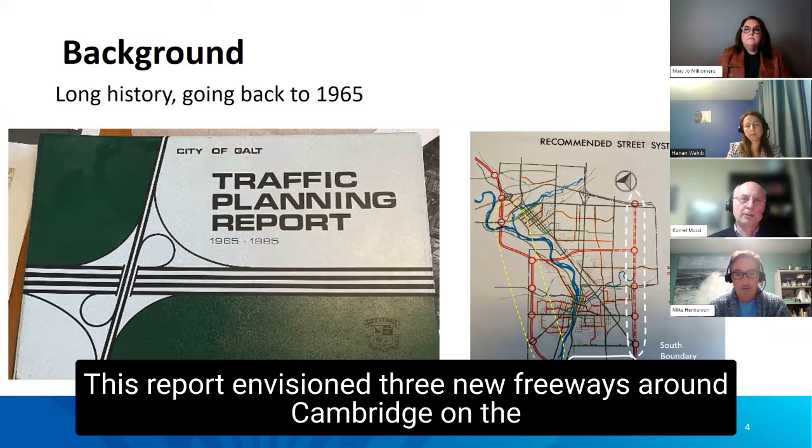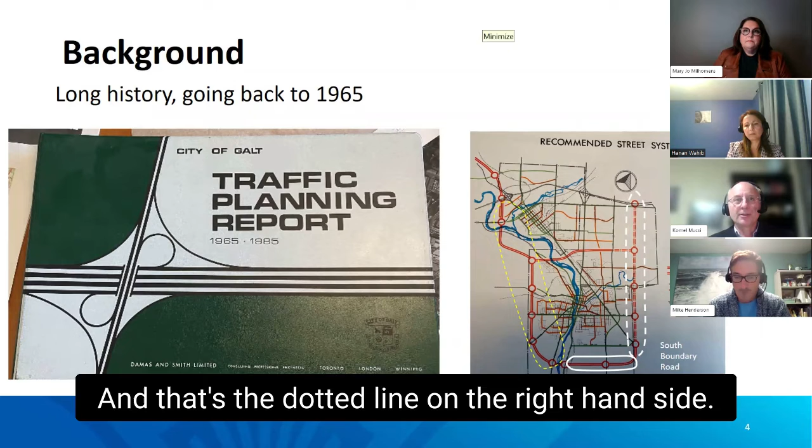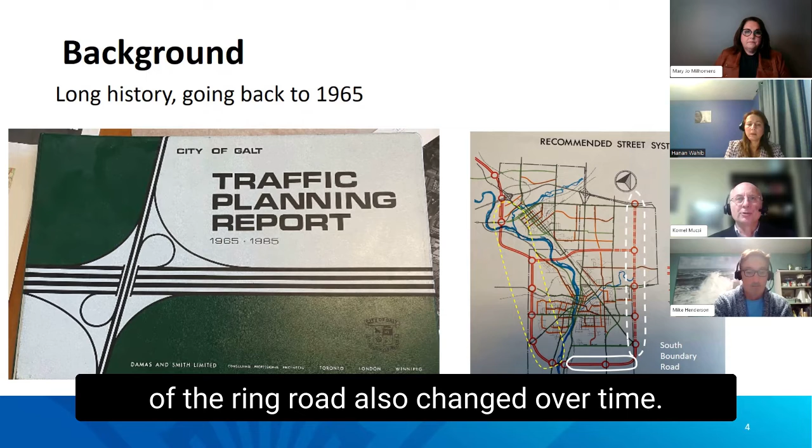The first report that talks about the implementation of a ring road was the traffic planning report done in 1965. This report envisioned 3 new freeways around Cambridge. On the west side, which is the dotted yellow line, on the south side, and it was meant to be built by 1985, that's the white solid line at the bottom, and one on the east side to be built post 1985, and that's the dotted line on the right-hand side. As I will explain in a minute, not only did the dates of implementation change by a few years, actually decades, the scope of the ring road also changed over time. Next slide.

A number of studies followed the 1965 traffic planning report. They had refinements, but continued to include the ring road concept until 2004. The 2004 detailed transportation network review introduced a no bridge option. As we understand today, this was the result of public opposition to the new road on the west side and opposition to the bridge. And those two pieces would form the west side of the ring road, and they were taken out from the ring road concept. The new truncated ring road or bypass kept the new roadway on the south side and on the east side. Next slide.

Late 2020, the region got an explicit request from the City of Cambridge Council to consider removing trucks from the downtown core as the new McQueen-Shaver Boulevard was nearing completion. And the new road opened in the fall of 2021. Next.

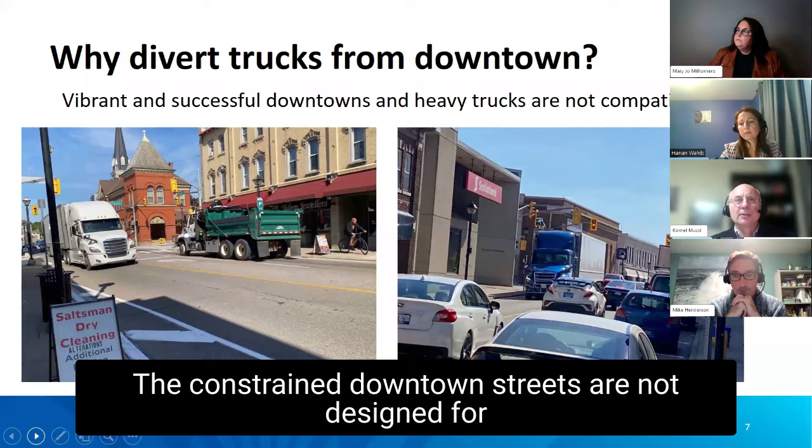So one of the big questions is why divert trucks from the downtown? We can say that a vibrant and successful downtown and heavy trucks are actually not compatible. The constrained downtown streets are not designed for concentrated movement of heavy trucks or car traffic. There are frequent signals, curbside activities, sidewalks are at the edge of the roadway, and there's very little or no buffer space. There is noise and air pollution in a very narrow corridor with little potential for dispersion. And of course, there are safety concerns, especially for pedestrians and cyclists.

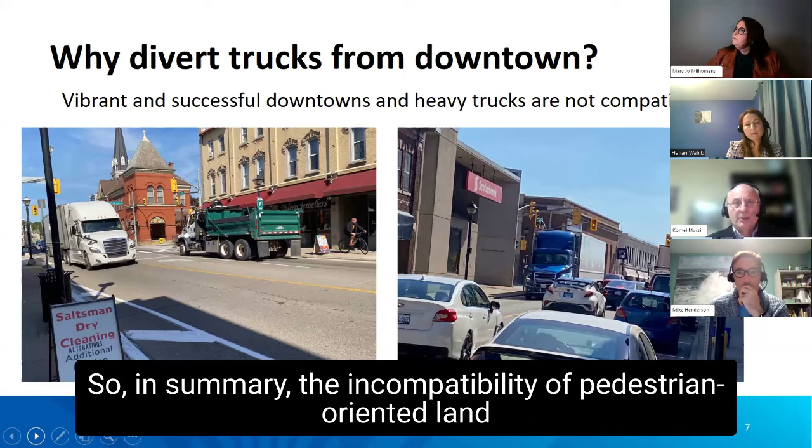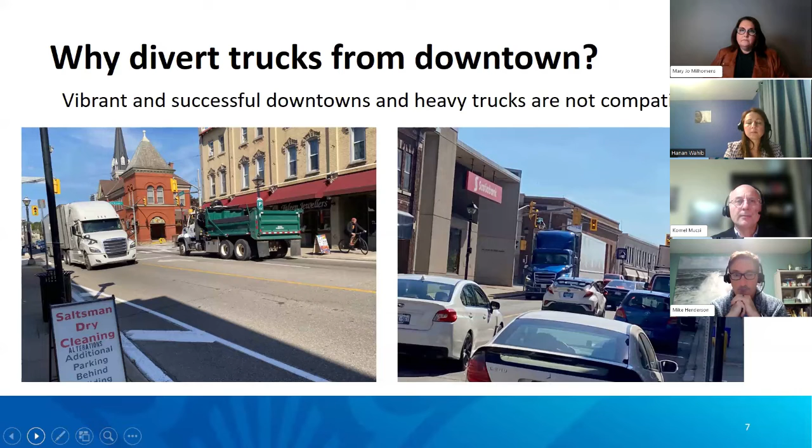So in summary, the incompatibility of pedestrian-oriented land use and truck traffic movement hampers the development of downtown into a much more successful place. And at this point, I would ask Hanan to continue with the presentation. Next slide. Thank you, Kornel.

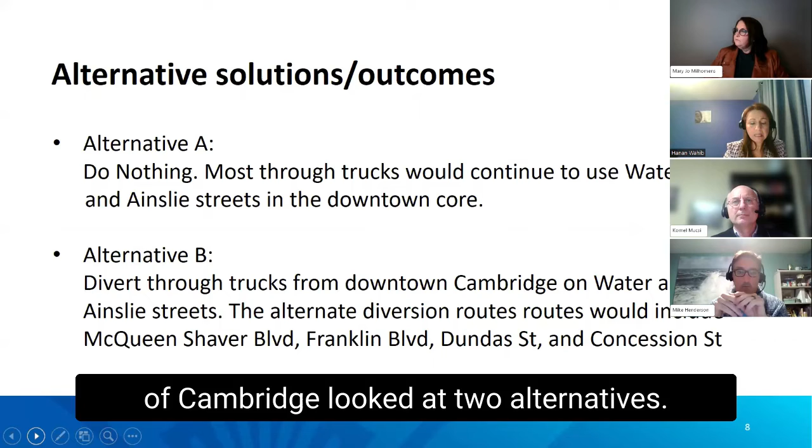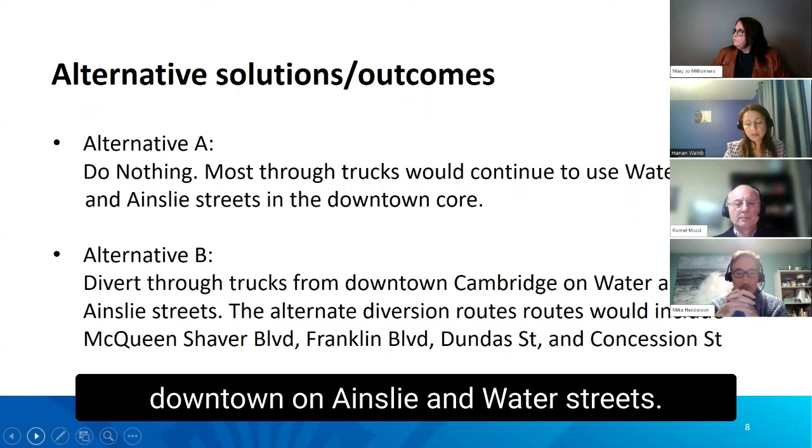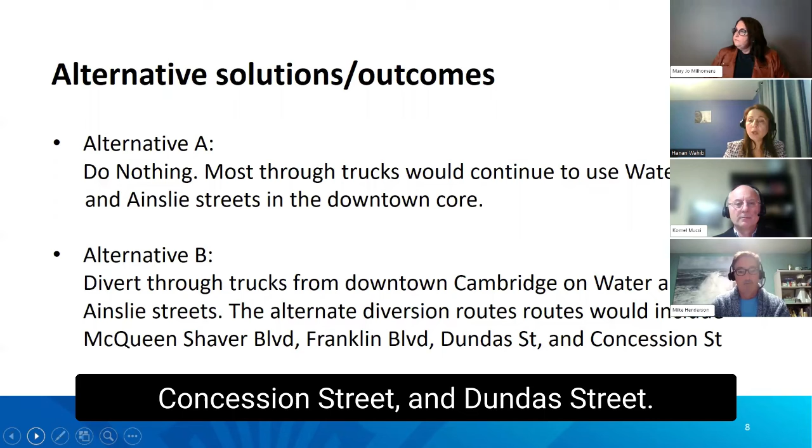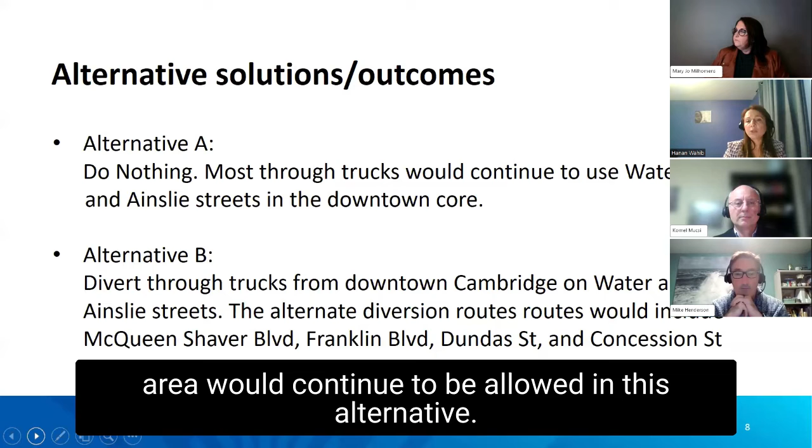The project team, consisting of staff from the Region of Waterloo and staff from the City of Cambridge, looked at two alternatives. Alternative A is to do nothing, where no change to the existing condition would happen, and through trucks would continue to be allowed to drive through the downtown on Ainslie and Water Streets. Alternative B is to divert trucks that are passing through the downtown streets to other routes such as McQueen-Shaver Boulevard, Franklin Boulevard, Concession Street, and Dundas Street. And just to be clear here, the trucks that are making deliveries in the downtown area would continue to be allowed in this alternative. Next slide, please.

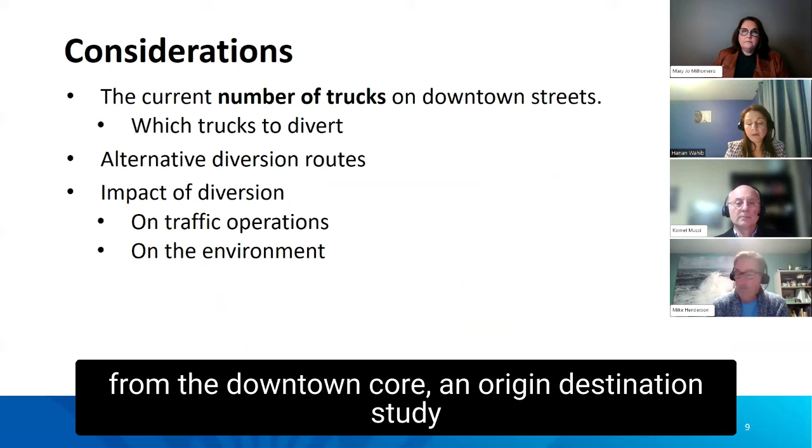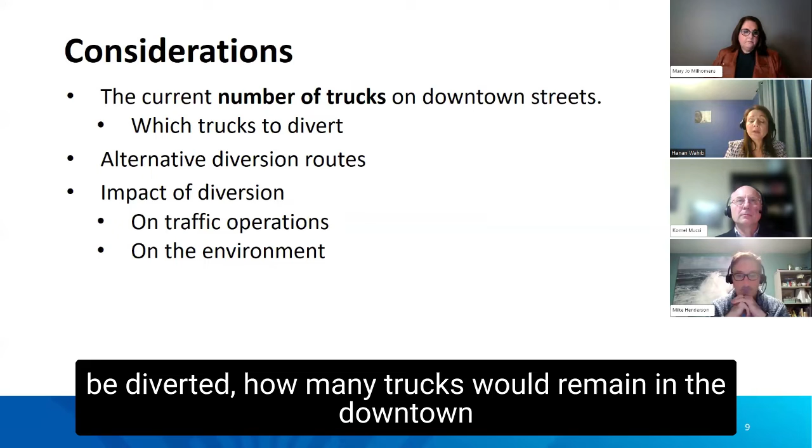So the considerations we looked at when we had those two alternatives: as a response to the City of Cambridge request to investigate the possibility of diverting trucks from the downtown core, an origin destination study was completed to understand a few points. Among them is how many trucks are currently using the downtown streets, how many trucks are passing only and could be diverted, how many trucks would remain in the downtown for deliveries,

where trucks would be diverted, what is the impact of the diversion on the traffic operations, such as what is the number of the trucks in various corridors, and what is the impact on the travel time for diverted trucks. The route for diverted trucks could be longer, so how the travel time would be impacted by the diversion.

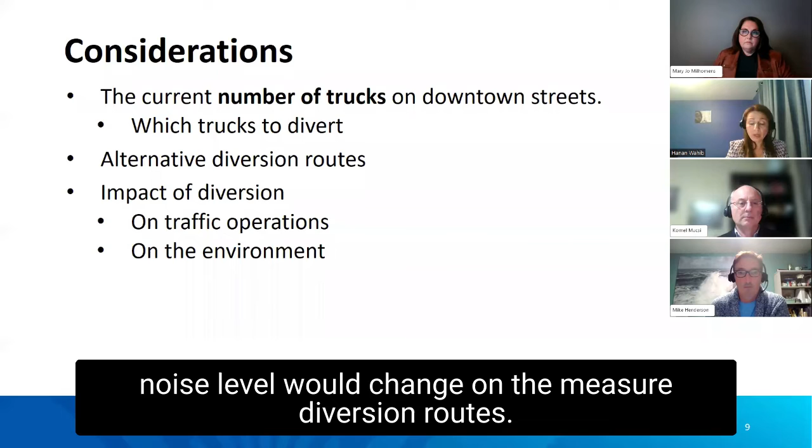Another consideration staff looked at is the impact of the diversion on the adjacent environment, such as the noise level. How the noise level would change on the major diversion routes, and the major diversion routes here are McQueen-Shaver Boulevard and Franklin Boulevard. So those are the considerations that we wanted to look at before we assess the alternatives. Next slide, please.

Next slide. Yeah, thank you.

So the origin destination study concluded that approximately 1,600 trucks are traveling through the downtown core on Water and Ainslie streets every day. Approximately 62% of the 1,600 trucks could be diverted. And this number is between 1,000 and 1,150 trucks per day.

And approximately 38% of the 1,600 trucks would remain in the downtown core for local deliveries. And those would continue to be allowed in the downtown area if the diversion is approved. And the number of these trucks would be between 450 and 600 trucks per day. Next slide, please.

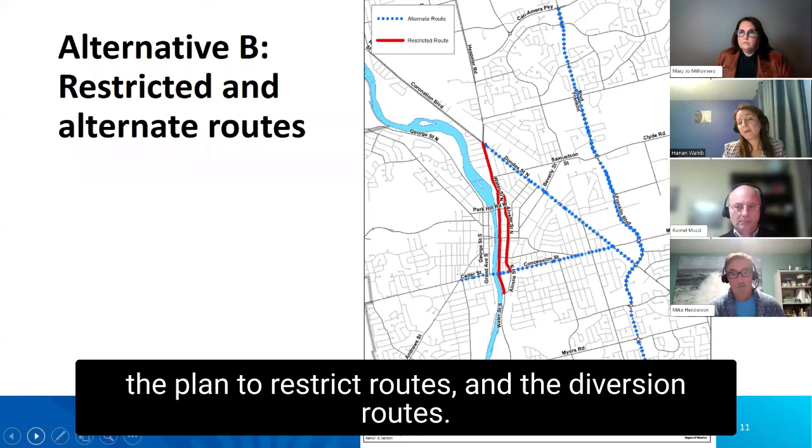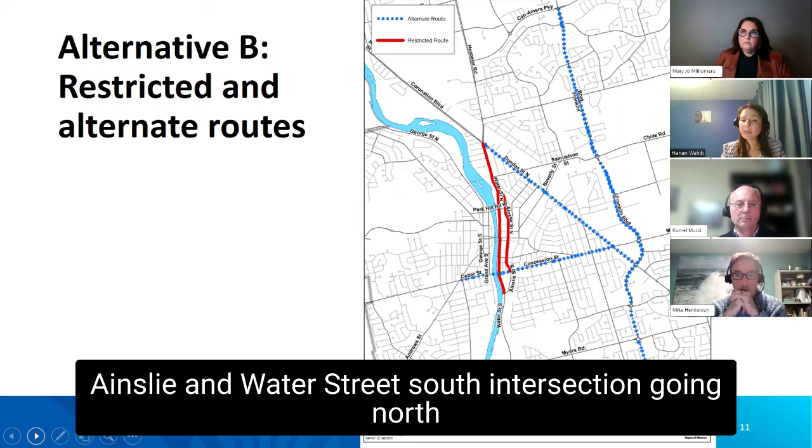In this slide, we have a map that shows alternative B, where we would like to show the planned restricted routes and the diversion routes. So the red solid line is the restricted routes, where it extends on Water Street from the Ainslie and Water Street South intersection, going north until the Dundas and Water Street intersection.

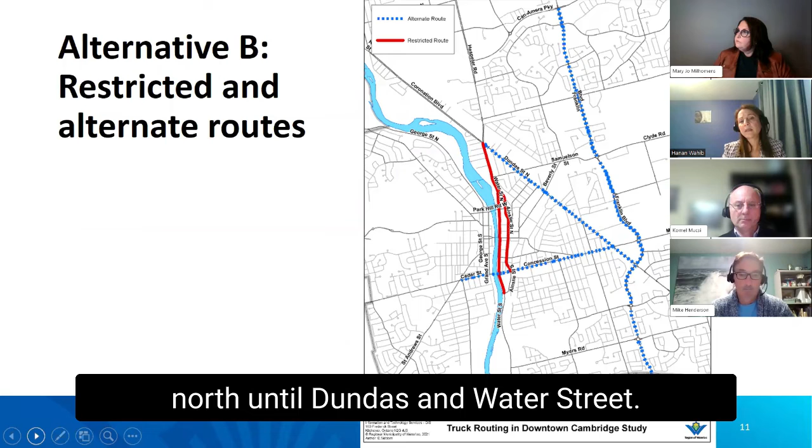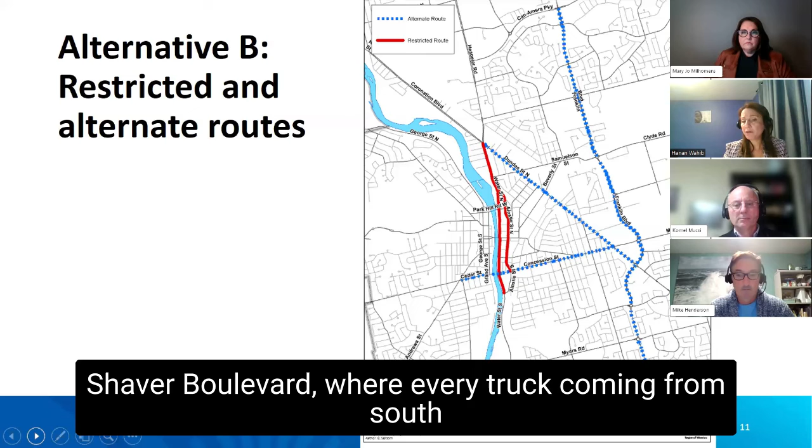And on Ainslie Street, it extends from Concession Street going north until Dundas and Water Street. So those are the two routes that would be restricted for through trucks. And the major diverted route would be McQueen-Shaver Boulevard, where every truck coming from the south going to the north would take McQueen-Shaver. So this is a major one.

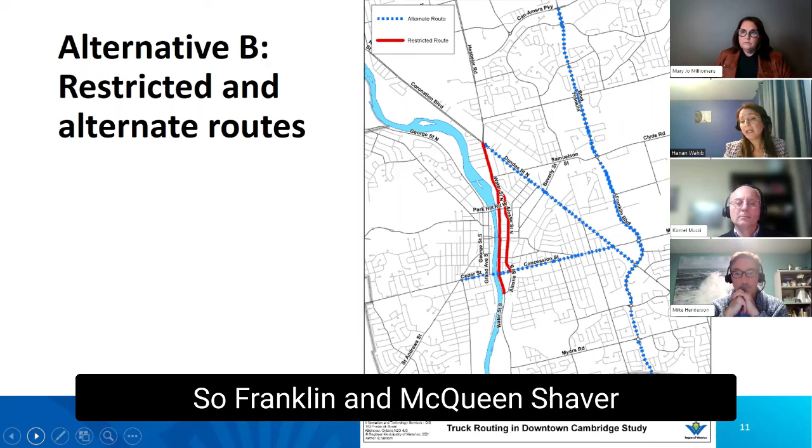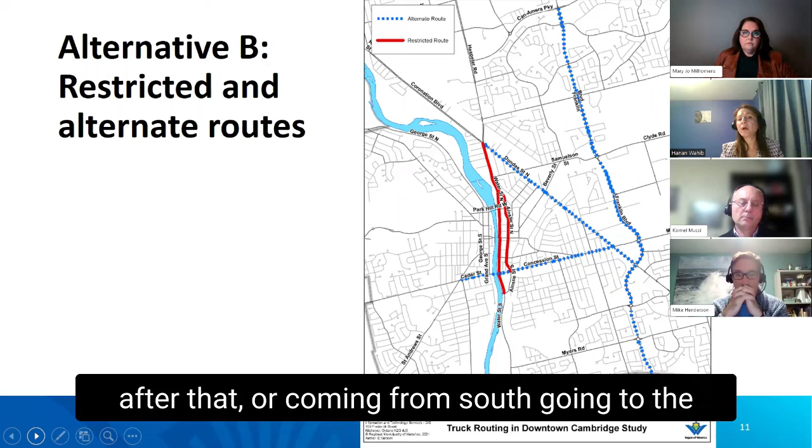And after that, eventually they'll take Franklin Boulevard. So Franklin and McQueen-Shaver are the major diversion routes. And we would have Concession and Dundas Street also; we are considering them as diversion routes because they would take some of the trucks coming from the west to the east and going to the north after that, or coming from the south going to the west of the Hespeler Road area on Coronation Boulevard. Next slide, please.

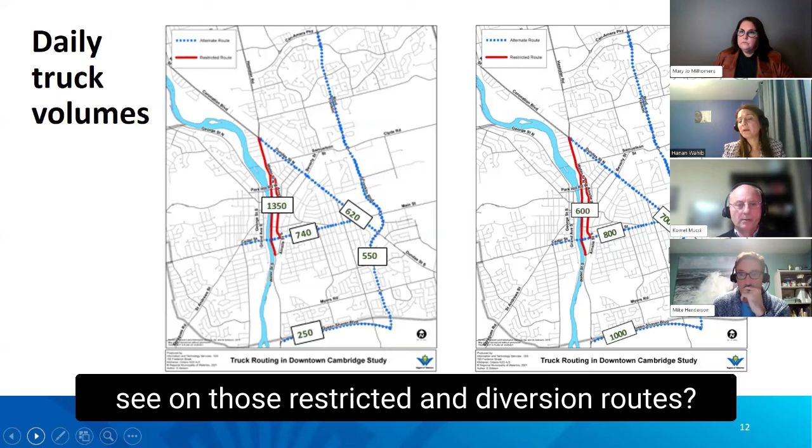In this slide, we are trying to show the current total trucks per day on those routes, the restricted and the potential diversion routes. And on the other map, we show the number of trucks on those routes with the diversion. If the diversion is approved, what is the number of trucks we would see on those restricted and diversion routes. So the map on the left shows the current total trucks per day.

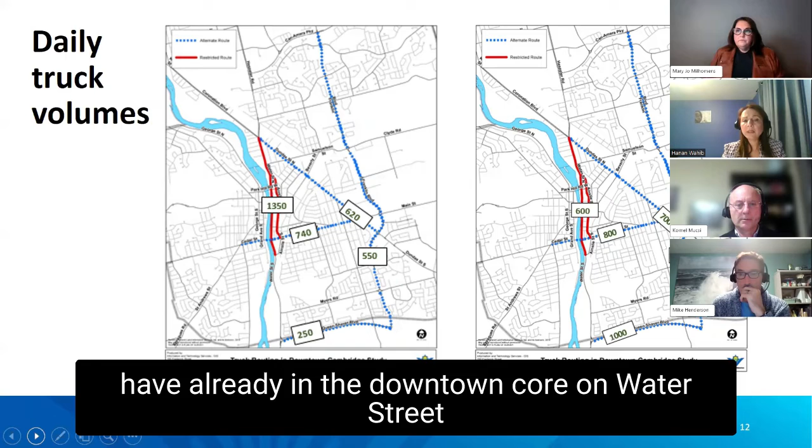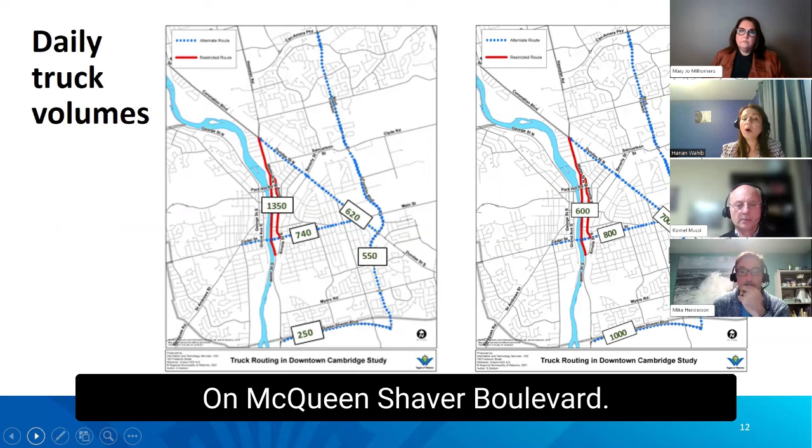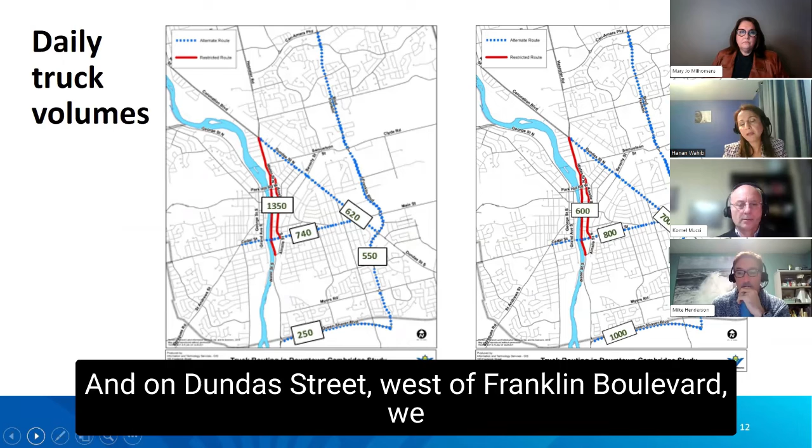And as you can see in the map, we have already in the downtown core on Water Street and on Ainslie Street approximately 1,350 trucks per day. On Concession Street, we have 740 trucks per day. On McQueen-Shaver Boulevard, we have 250 trucks per day. On Franklin Boulevard, south of Dundas Street, we have 550 trucks per day. And on Dundas Street, west of Franklin Boulevard, we have 620 trucks per day.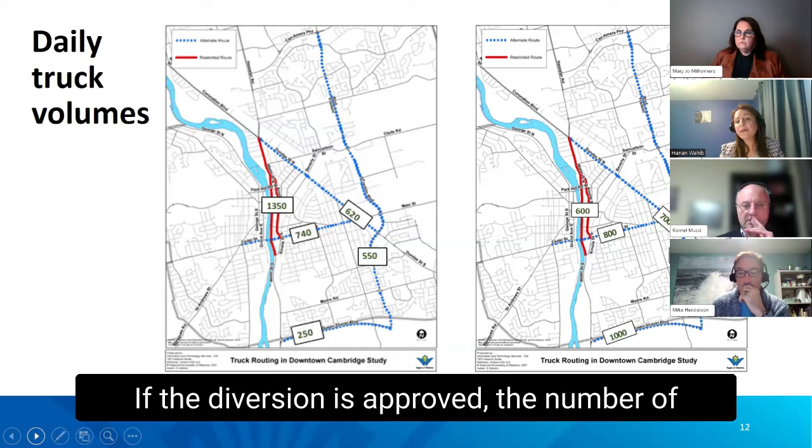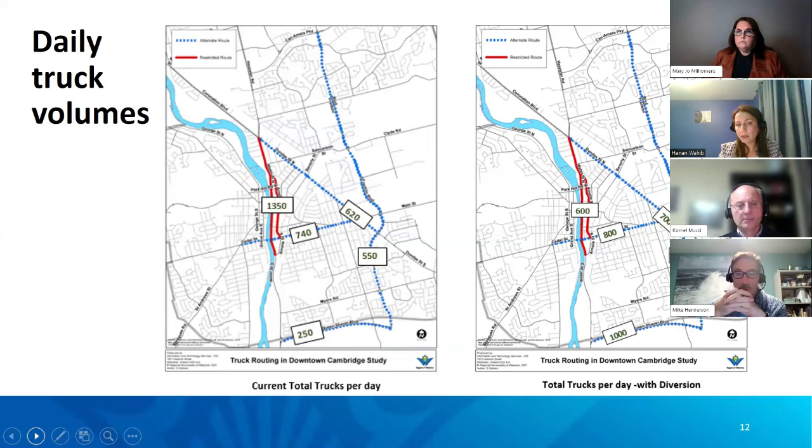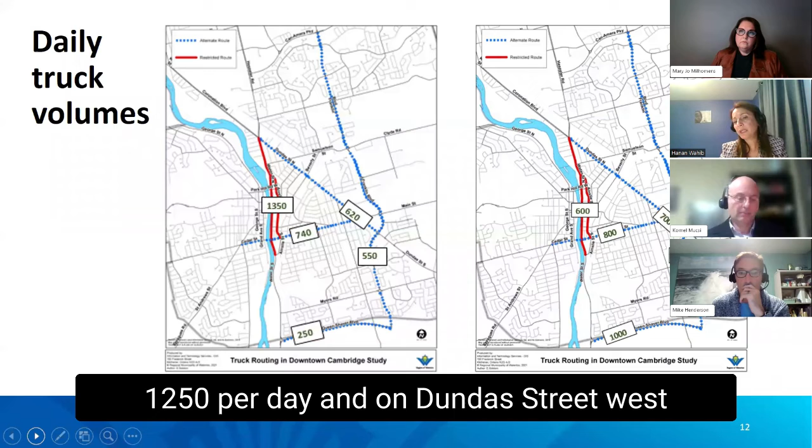The map on the right side shows the number of trucks with the diversion. If the diversion is approved, the number of trucks in the downtown core would be reduced to around 600 trucks per day. It would increase on Concession Street from 740 to 800 trucks per day, on McQueen-Shaver to 1,000 trucks per day, and on Franklin Boulevard, south of Dundas Street, to 1,250 per day. And on Dundas Street, west of Franklin, it will increase from 620 trucks per day to 700 trucks per day. Next slide, please.

In this slide, we are trying to describe the environment of walking, cycling, and driving in the downtown area and on the diversion routes. We have three examples: the photo on the far left showing the downtown area, the one in the middle showing McQueen-Shaver Boulevard, and the one on the right showing Main and Concession Street. So in the downtown area, as you can see, mostly we have narrow sidewalk with minimum to no boulevard, we have no cycling facilities, and we have a large number of trucks driving on the driving lanes in the downtown area.

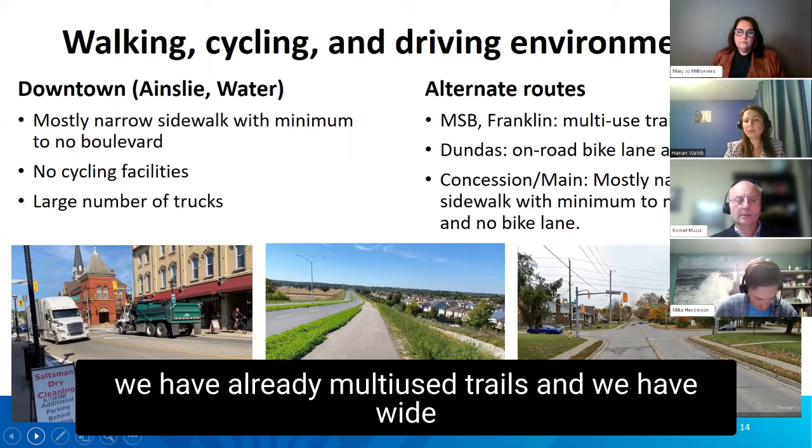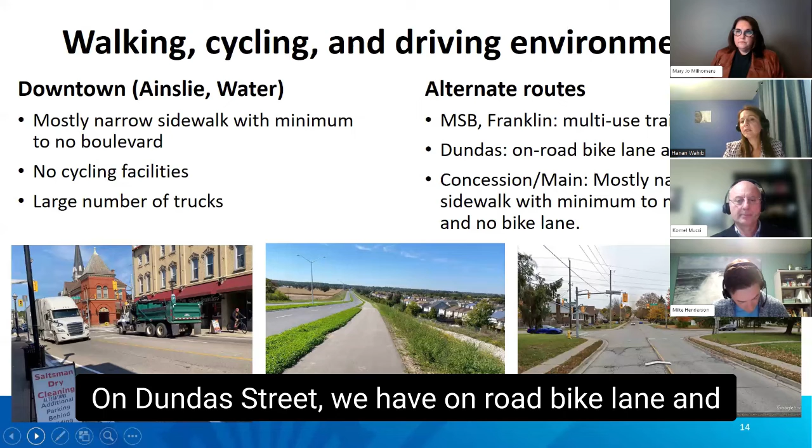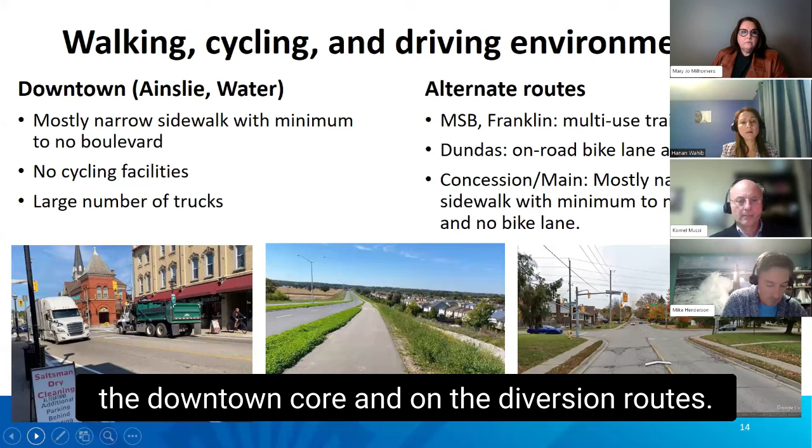While on the alternative routes on McQueen-Shaver Boulevard and Franklin Boulevard, we already have multi-use trails, and we have wide boulevard there, and the lanes are wide enough for trucks, cars, and everything. On Dundas Street, we have on-road bike lane and we have sidewalk. While on Concession Street and Main Street, we also have mostly narrow sidewalk with minimum to no boulevard and no bike lane. So this is just a description of the environment on the downtown core and on the diversion routes. Next slide, please.

In this slide, we are trying to show most of the aspects related to each alternative. So for example, alternative do nothing: if we don't do anything, we will have minimum increase in truck volumes on other potential diversion routes like McQueen-Shaver, Franklin, and other routes. And a noise wall wouldn't be warranted on McQueen-Shaver under the natural diversion. What we mean by natural diversion is what is happening right now without banning trucks from going through downtown. Some trucks are already taking McQueen-Shaver. So if they keep taking McQueen-Shaver without banning trucks in the downtown area, a noise wall wouldn't be warranted.

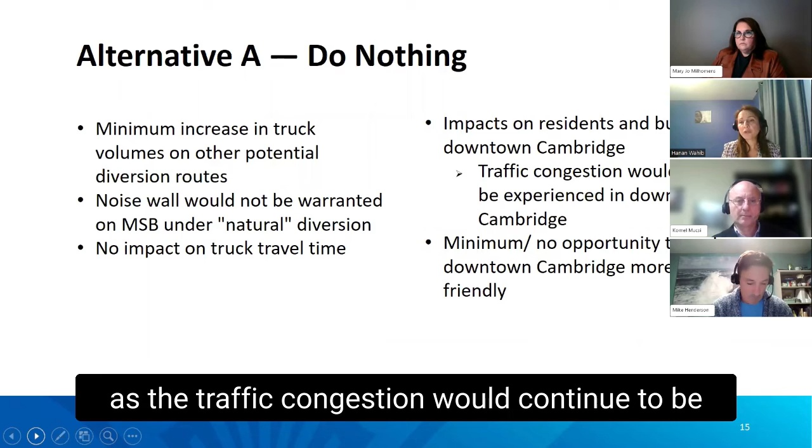Other aspects related to do nothing: there is also no impact on truck travel times. The trucks will continue to use the same routes, and there will not be any impact on the travel time. On the other hand, impacts on the residents and businesses in downtown Cambridge would continue, and the traffic congestion would continue to be experienced in the downtown area. Also, we will have minimum to no opportunity to make downtown Cambridge a more pedestrian, cyclist, and people friendly environment. Next slide, please.

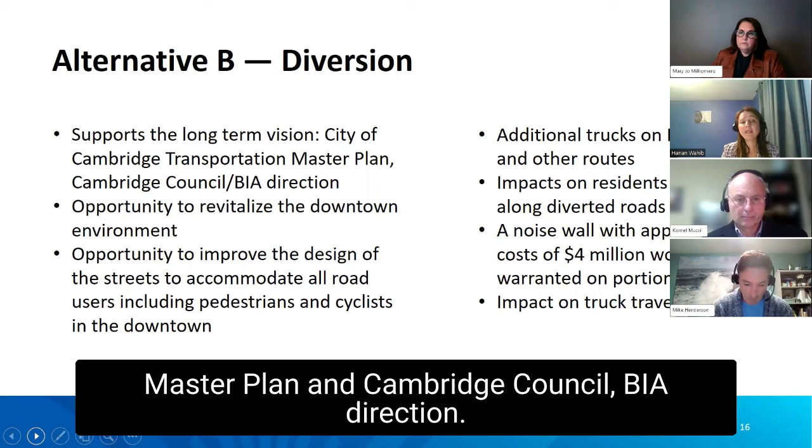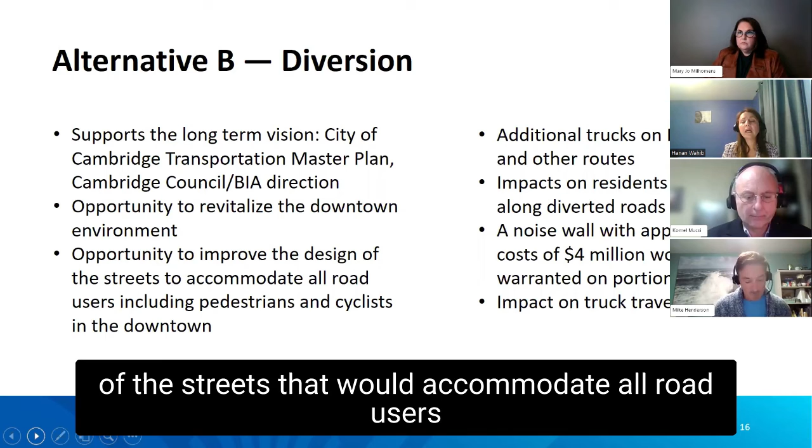Alternative B, with a diversion. With this alternative, we would be supporting the long-term vision of the City of Cambridge Transportation Master Plan and Cambridge Council BIA direction. There will be an opportunity to revitalize the downtown environment. There will be an opportunity to improve the design of the streets to accommodate all road users, including pedestrians and cyclists in the downtown area.

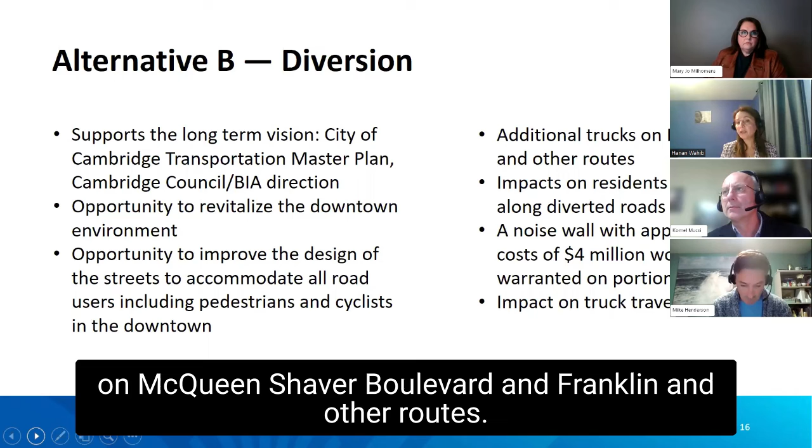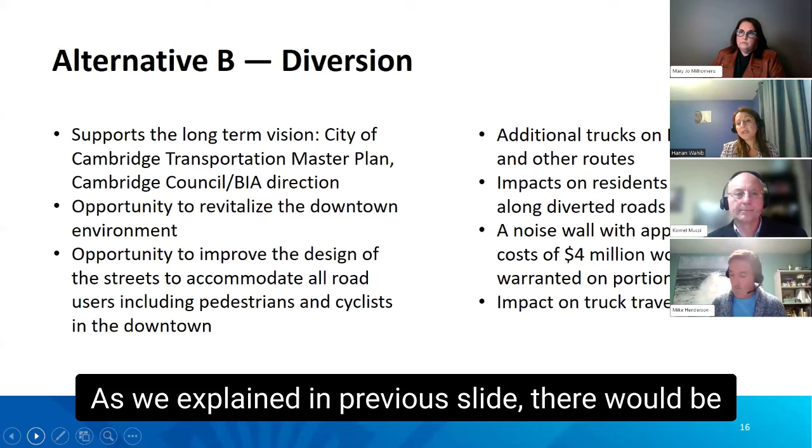On the other hand, additional trucks would be on McQueen-Shaver Boulevard, Franklin, and other routes. Impacts on residents and businesses along the diverted routes would also be experienced. A noise wall with an approximate cost of 4 million would be warranted on portions of McQueen-Shaver Boulevard. Also, as we explained in the previous slide, there will be some impacts on truck travel times in this alternative. Next slide, please. Kornel, would you please jump in?

Yes. So one of the main concerns is that the noise levels will go up if some of the trucks traveling today on Ainslie and Water are diverted to McQueen-Shaver Boulevard. And although the opening of McQueen-Shaver Boulevard significantly changed the landscape and increased the noise levels compared to before the road was opened, without the truck diversion the noise levels do not meet the policy threshold for erecting noise barriers. There are many other roads in the region which have higher traffic and truck volumes and do not have noise barriers, since they do not meet the policy thresholds for noise walls.

We have also estimated that if alternative B is implemented, which would divert about 60% of the truck traffic, the noise would reach the threshold for parts of McQueen-Shaver Boulevard and Franklin Boulevard. This practically means that the diversion of some of the trucks from the downtown core needs to be combined with the construction of noise barriers, and as such it has a cost implication. My colleagues have done a preliminary cost estimate, and it would be around 4 million to construct the noise barriers. This is a high-level estimate. Work is still ongoing on the analysis and design of the required noise attenuation measures. Next slide.